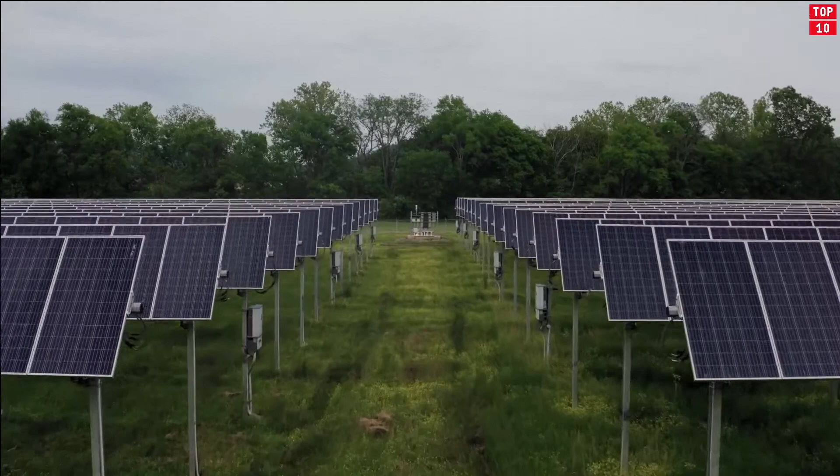It is estimated that we use a staggering 320 billion kilowatt-hours of energy every day. While most of this enormous requirement is addressed by burning fossil fuels like coal, petroleum oil, and natural gas, there are some exciting alternatives which are promising a cleaner and greener future. These are the 10 most promising future energy resources.

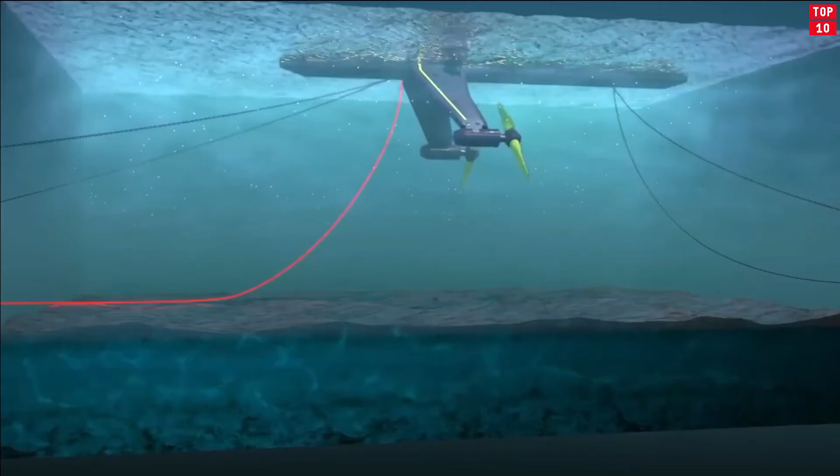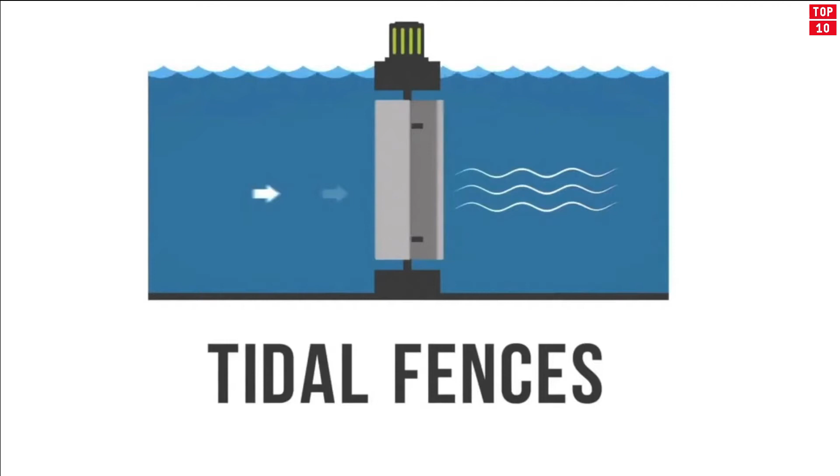Tidal power is one of the major renewable energy sources, but is in its early stages. It harnesses the energy from the tidal source and wave action from the gravitational pull of both the moon and the sun. Tidal power can be generated using 3 technologies. Barrages, or dams, are built across the bay or river estuary, which by controlling the flow rate through the turbines generates electricity. Tidal fences are a type of tidal power system that has vertical axis turbines mounted in a fence, or row, placed on the seabed.

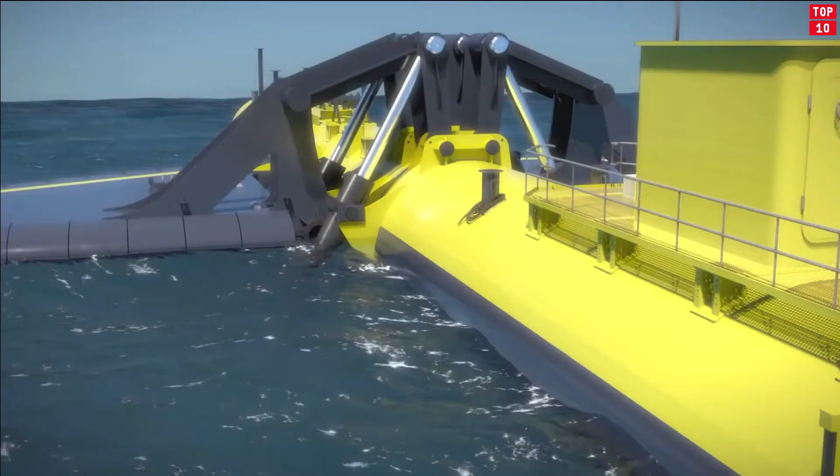Tidal turbines are arranged under water and rotate like wind turbines. Researchers feel that tidal technology development is more reliable, and the quality of the power produced by tidal sources is better than other renewable resources. So tidal power will play an important role in future technology.

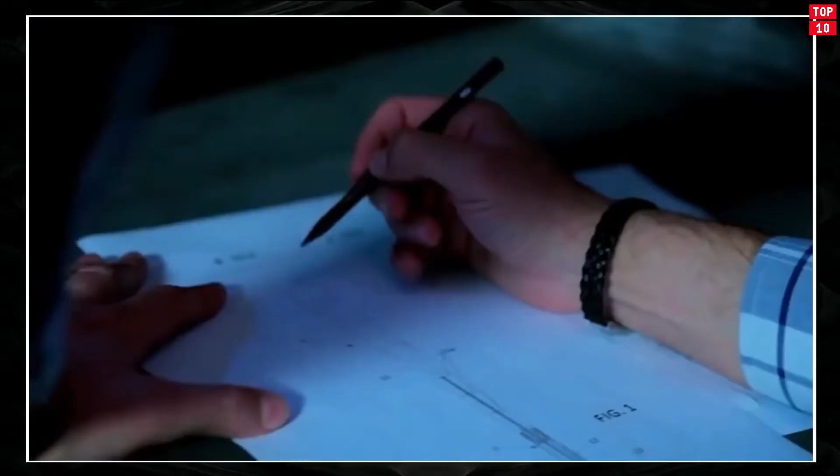Vortex bladeless. Any wind generator is potentially dangerous. The machine's kinetic power is almost impossible to control. That is why such power stations are typically mounted in remote places. This problem was addressed by the Spanish company Vortex Bladeless. Such wind generators turned out to be more efficient than traditional blade ones, and required less time and money to install. Furthermore, the system does not actually entail large rotating elements.

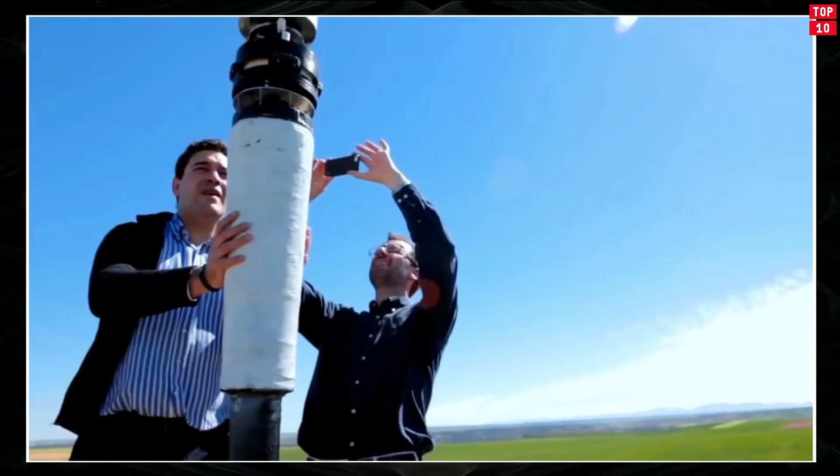The working principle of bladeless generators is way more difficult, but its efficiency could never be denied. Vortex flows blow at a vertical generator, thus moving the power generating axis. Obviously, designers do not disclose technical details. However, a single 492-foot high generator of this type can produce up to 1 megawatt of electricity.

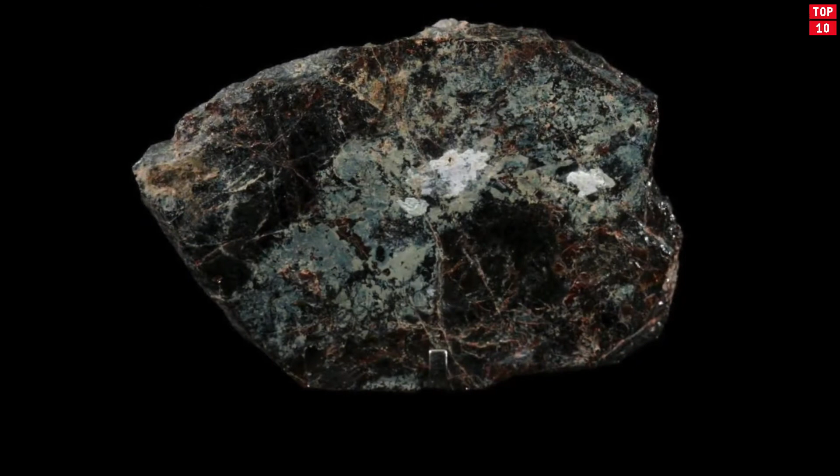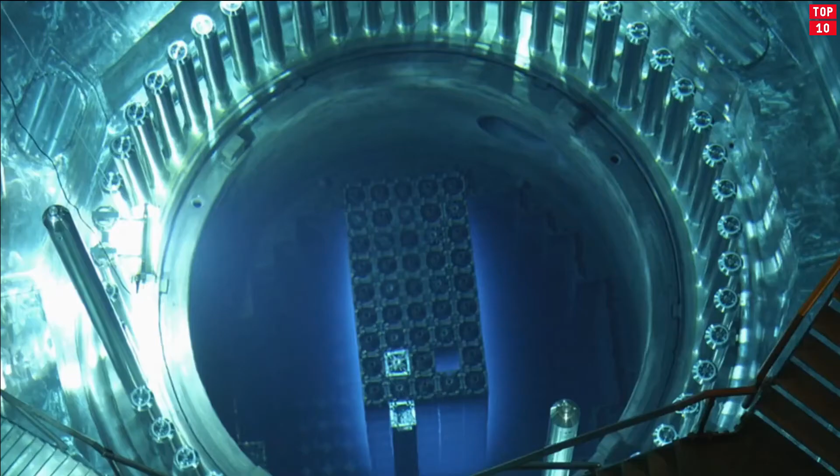Thorium. Thorium is the 90th element on the periodic table, the second heaviest element on Earth. Thorium is a basic element of nature, like iron and uranium. Like uranium, its properties allow it to be used to fuel a nuclear chain reaction that can run a power plant and make electricity. Thorium is around 3 times more abundant than uranium in the Earth's crust.

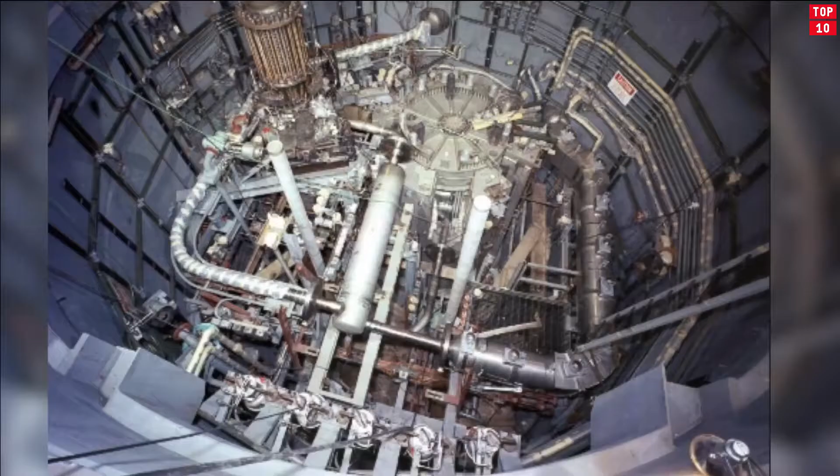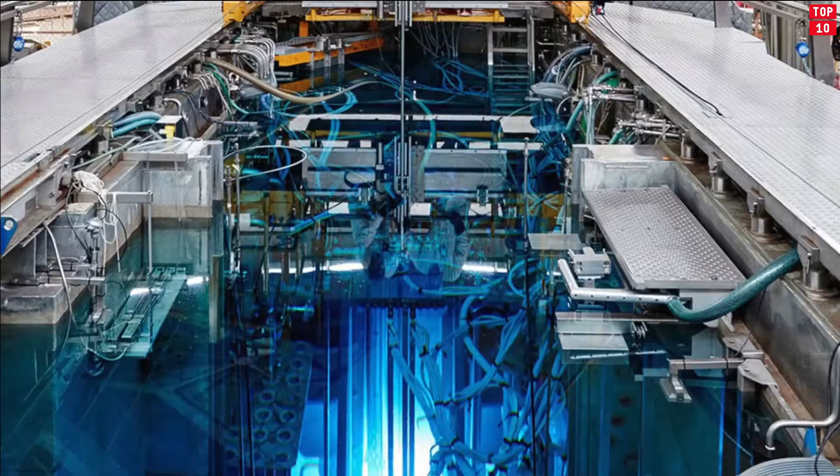Since the beginning of the nuclear era, significant scientific attention has been given to thorium's potential as a nuclear fuel. A thorium reactor burns nearly all of its fuel; as a result, it will produce less waste. Thorium reactors are a different way to generate electricity that could benefit the world—more efficient than their fossil fuel counterparts, safer than a conventional nuclear plant, and generating no carbon emissions as a byproduct. LFTRs are a viable solution for the future of our world's energy needs.

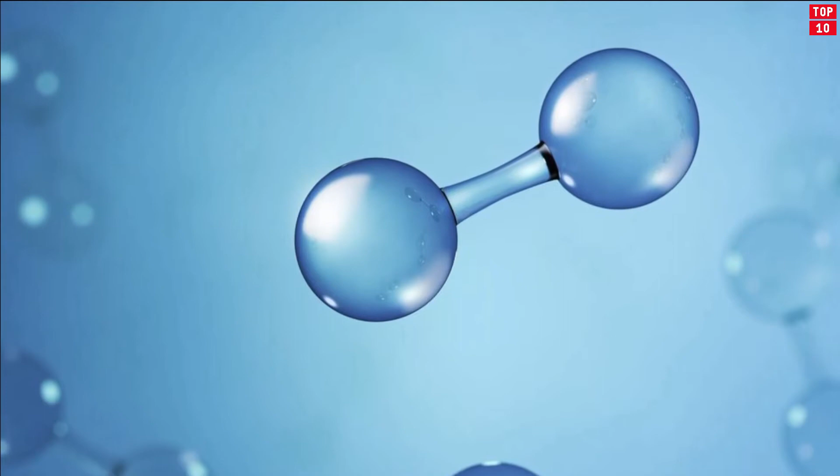Hydrogen. A colorless, odorless gas, hydrogen, which we all know from chemistry class, accounts for 74% of the total mass of the universe. It can be considered the simplest element in existence, which is abundantly available on Earth, but not in pure form. As hydrogen gas is lighter than air, it rises into the atmosphere. So hydrogen as a gas is not found naturally on Earth and must be manufactured.

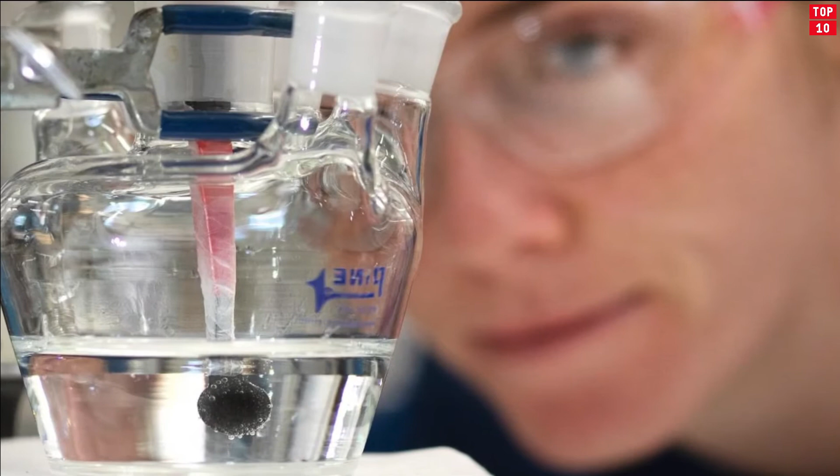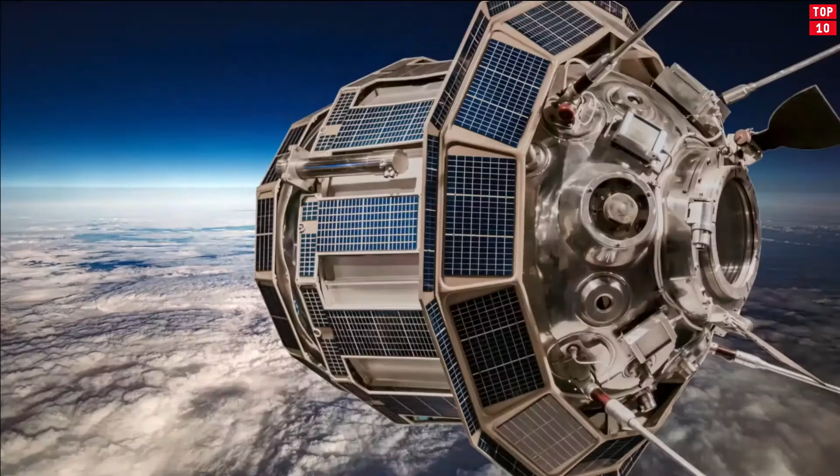Hydrogen has the highest energy content of any common fuel by weight, while also being the lowest energy content by volume. Currently, hydrogen is mainly used as a fuel in the NASA space program. Hydrogen will join electricity as an important energy carrier, since it can be made safely from renewable energy sources and is virtually non-polluting. It'll be fuel for zero-emissions vehicles.

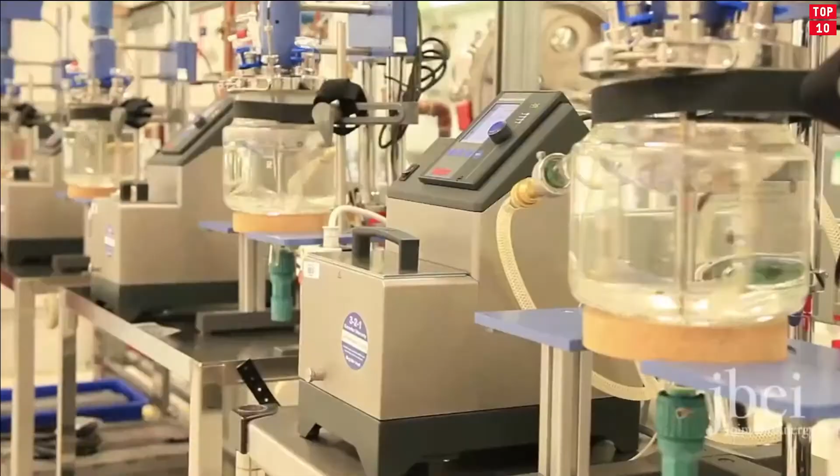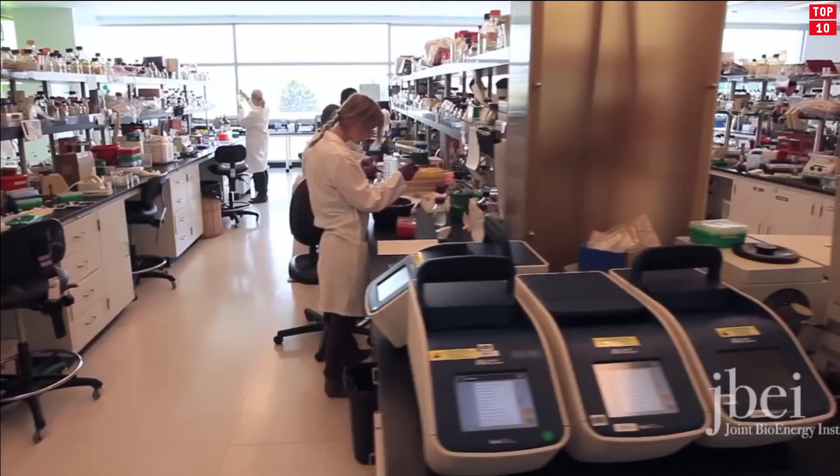Biofuels. Unlike other renewable energy sources, biomass can be converted directly into liquid fuels, called biofuels, to help meet transportation fuel needs. As biofuels emit less carbon dioxide than conventional fuels, they can be blended with existing fuels as an effective way of reducing CO2 emissions in the transport sector. New technologies and processes that produce fuels from waste and inedible crops are known as advanced or second-generation biofuels.

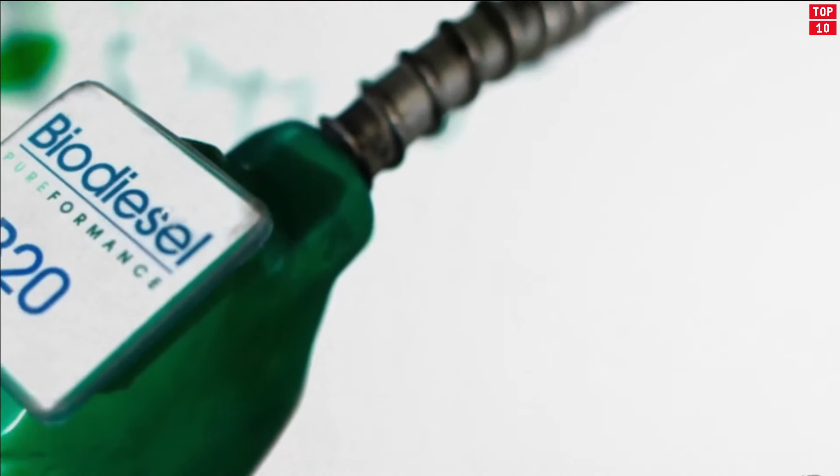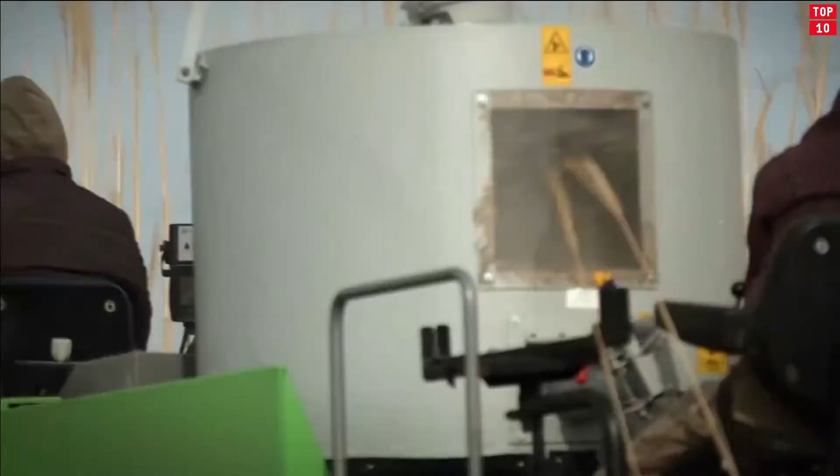The 2 most common types of biofuels in use today are ethanol and biodiesel, both of which represent the first generation of biofuel technology. Second-generation biofuels are derived from lignocellulosic crops and can be manufactured from different types of biomass. Interest in the use of biofuels worldwide has grown strongly in recent years due to high oil prices and concerns about climate change from greenhouse gas emissions.

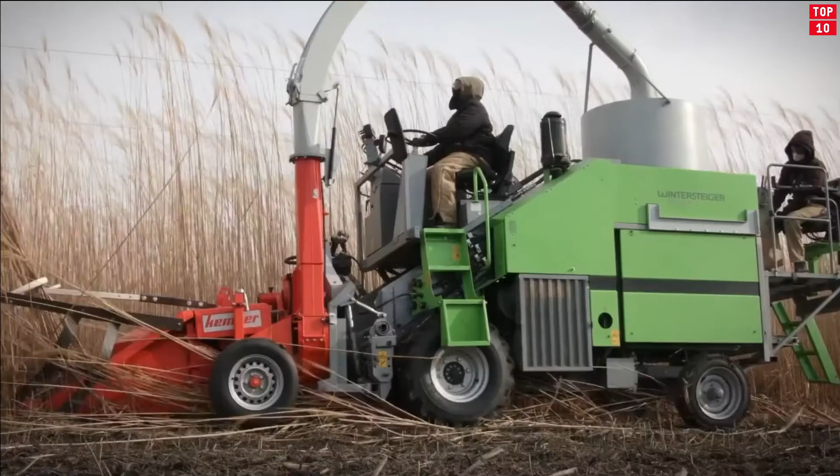In the future, they can be particularly important to help decarbonize aviation, marine, and heavy-duty road transport sectors. PaveGen.

People get more dependent on fossil fuels to produce electric power year by year. Resources don't add up, while the power consumption keeps increasing. The problem was of great interest to Laurence Kemball-Cook, as early as 2009, when he was a student at Loughborough University. In 10 years, he managed to create the PaveGen Company.

It manufactures sidewalk tiles that can convert pedestrians' energy into electrical power when they're walking over them. The tiles are made from recycled abrasion-resistant automobile tires. When stepped on, the tile surface depresses by 0.2 inches, inducing the induction transducer to generate electrical power. The energy can be used for sidewalk lights or accumulated in lithium batteries. The company's technology for this power generation is still kept secret.

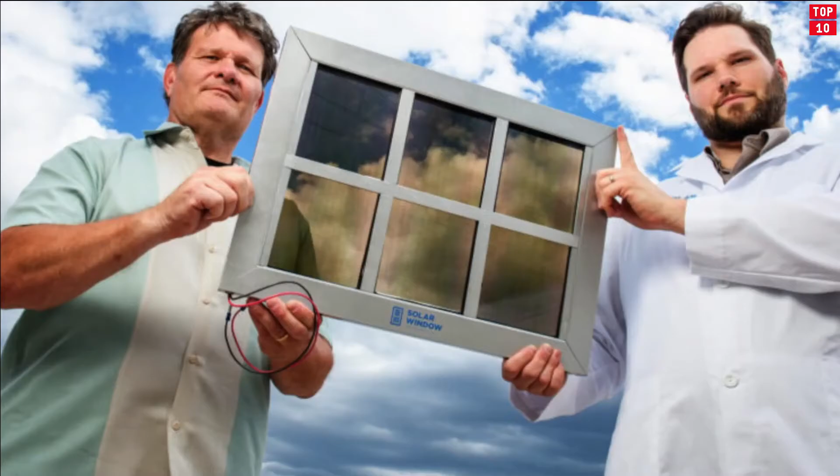Solar windows. Scientists have invented a new technology that will turn any window or glass into a photovoltaic solar cell. So your windows will turn into a solar panel. Solar windows passively produce solar power, and they could be a game-changing clean energy technology. Solar windows are exactly what they sound like: transparent windows that are capable of absorbing sunlight and turning it into useful electricity. These windows are capable of harvesting the part of the solar spectrum the eyes can't see and convert it into electricity, while letting regular visible light pass through.

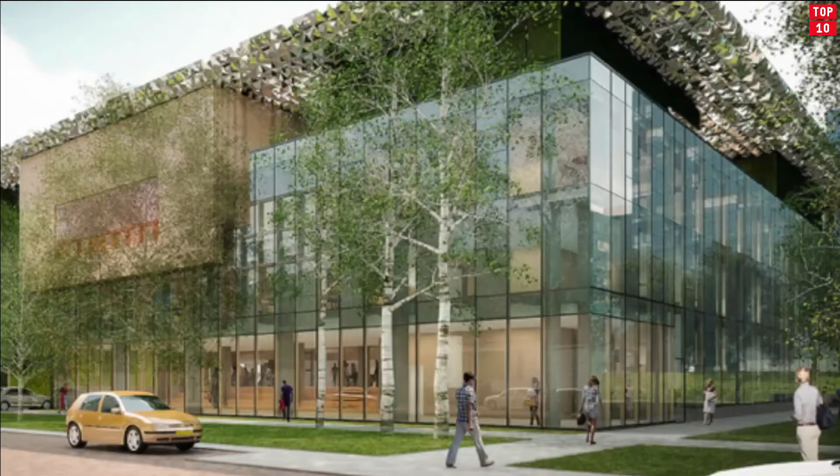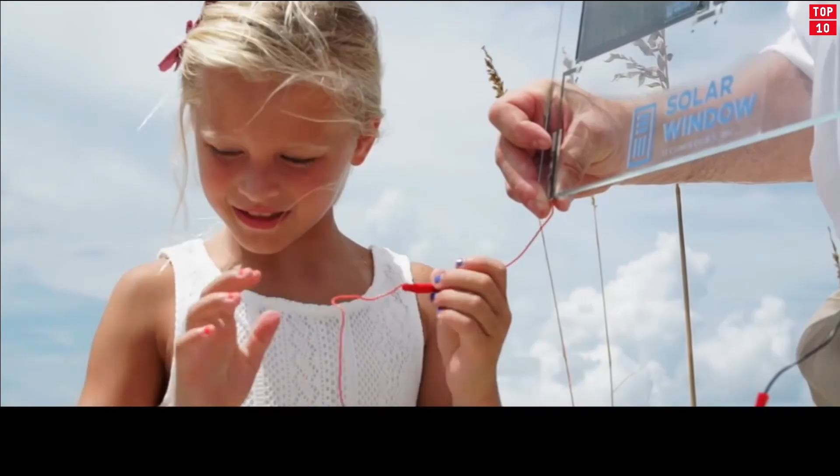Skyscrapers and other large buildings with glass facades use a coating on windows to reduce the glare and heat of the sun. So they can use sheets of transparent solar cells, which will help produce electricity to power the building too. Solar windows offer vast potential as an energy source. Renewable energy truly is having its moment in the sun, and this homely technology might play a significant role in our fight against climate change in the not-so-distant future. The current situation of this technology is not exactly awesome, but this is a step forward in figuring out how to turn windows into clean energy.

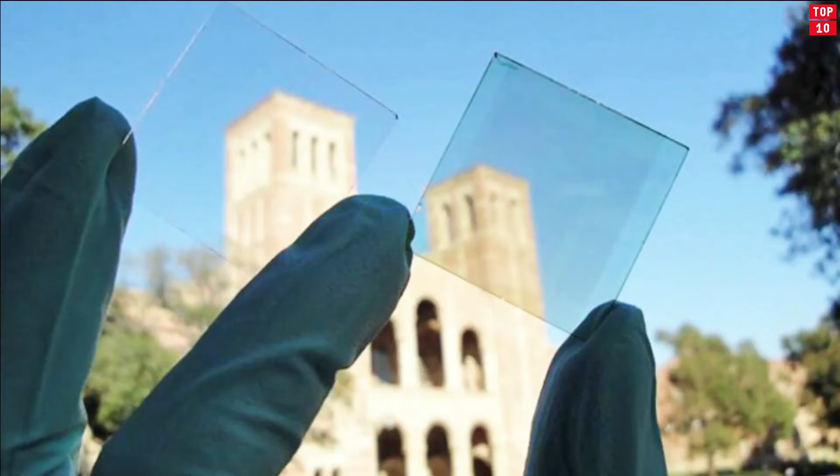Flying wind farms. As oil companies drill ever deeper to meet the world's thirst for fuel, a new wave of clean energy entrepreneurs are also searching far and wide for sources, but in the opposite direction. As you go higher, ground friction diminishes, giving way to increasingly stronger winds up to 100 miles per hour. Wind farms are constructed to harness this mechanical energy from the wind and convert it into electrical energy. Researchers estimate the high-altitude winds can provide 100 times more energy than currently needed to power the entire planet. At higher altitudes, the wind has more power and velocity, and it is more consistently predictable.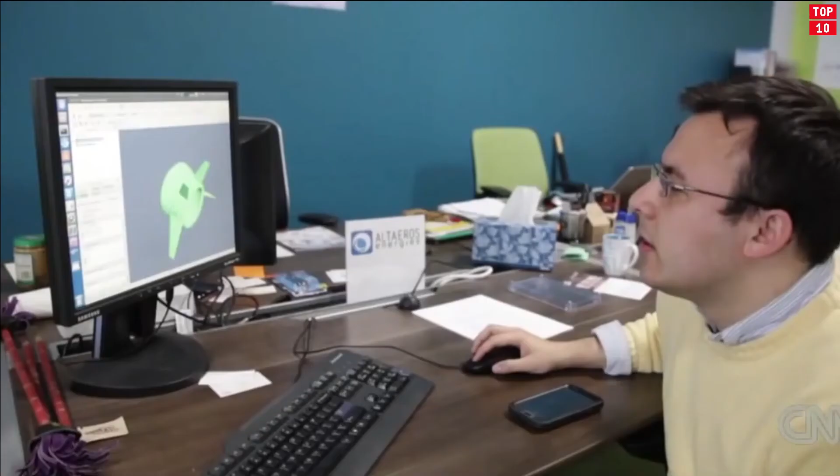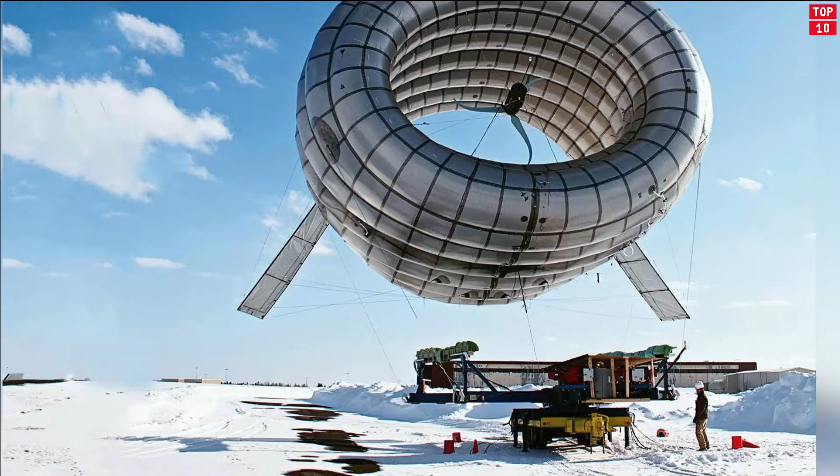That works out to be some 8 to 27 times the power produced at ground level. Right now, almost all wind projects are onshore, and the true energy bounty lives offshore, where winds are stronger and there are fewer restrictions on development. Wind turbines will increasingly move offshore in the near future. Countries like Denmark are already showing the rest of the world just how effective offshore wind energy can be.

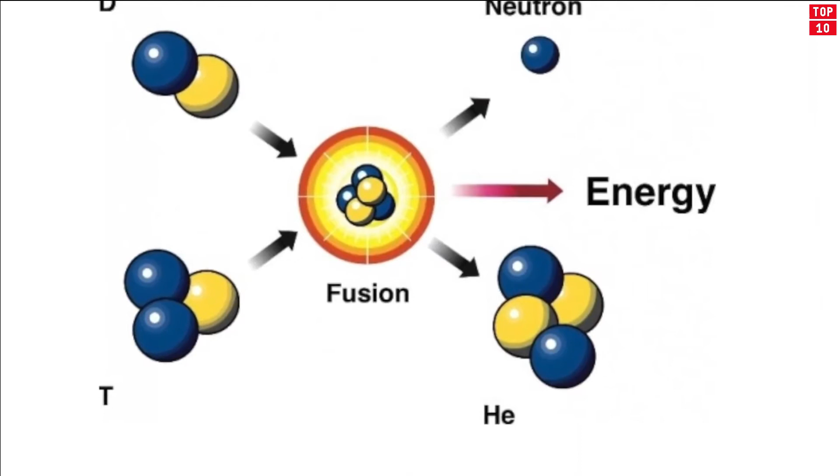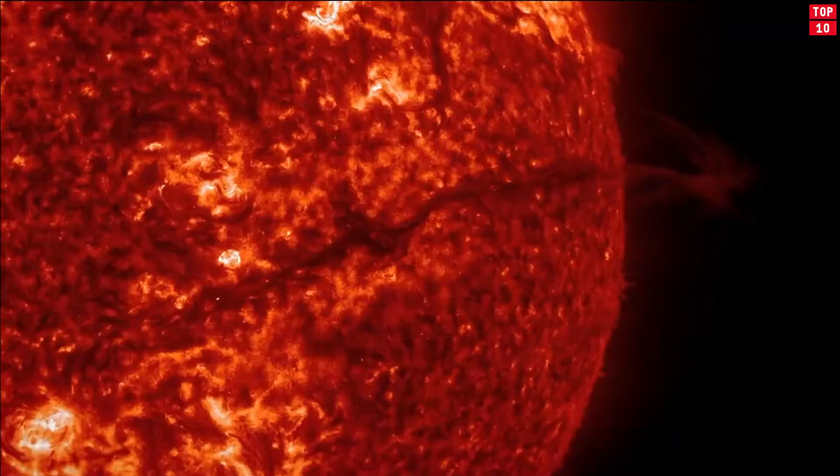Nuclear fusion. If there's a holy grail of clean energy generation, it's nuclear fusion, which promises limitless carbon-free power, without producing dangerous nuclear waste. Nuclear energy is gaining increasing importance as a clean source of power, meeting 13 to 14% of the planet's power needs. Fusion is the process that drives our sun. Natural solar fusion generates enormous quantities of heat and light. For decades, researchers have been trying to replicate this process on Earth, or build the sun in a box, as one physicist dubbed it. The basic idea is to take a type of hydrogen gas, heat it to more than 100 million degrees until it forms a thin, fragile cloud called plasma.

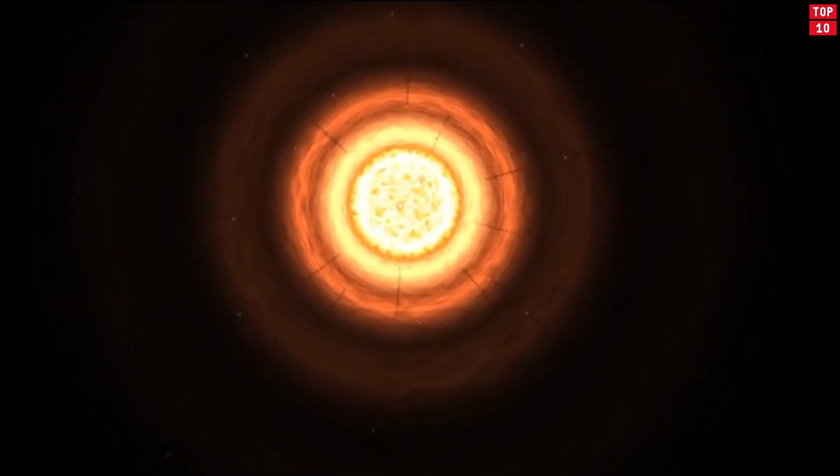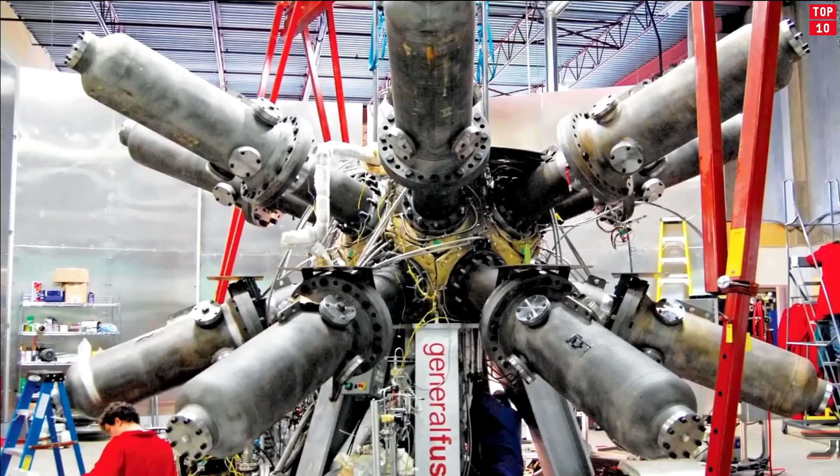And then control it with powerful magnets until the atoms fuse and release energy. In simple words, a man-built sun. Fusion has the potential to be a high-efficiency resource that is also extremely clean. Expect more nuclear power plants going forward, but not many. If the technology develops to a dependable level, it could well be the new king of the energy world, and could potentially be implemented anywhere.

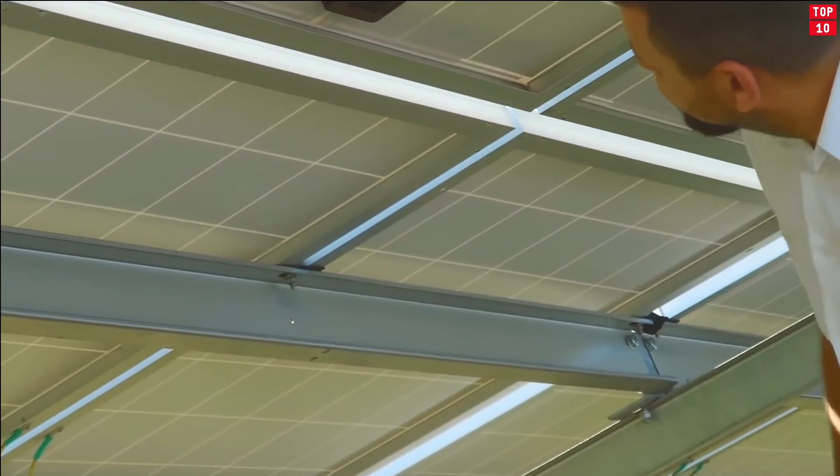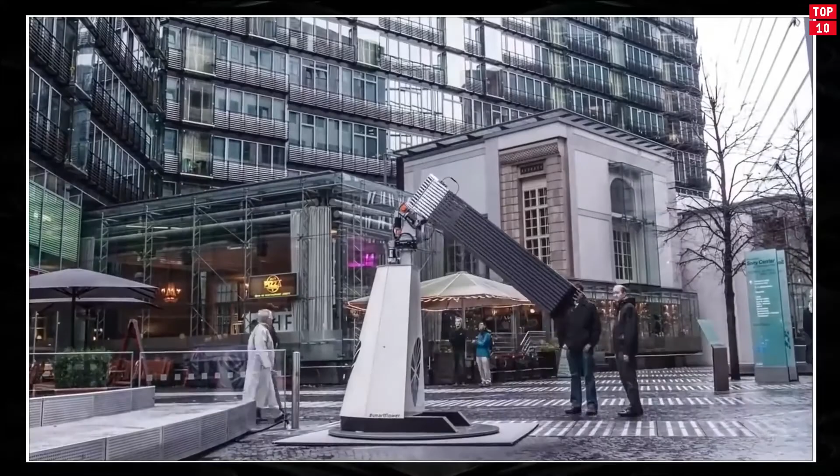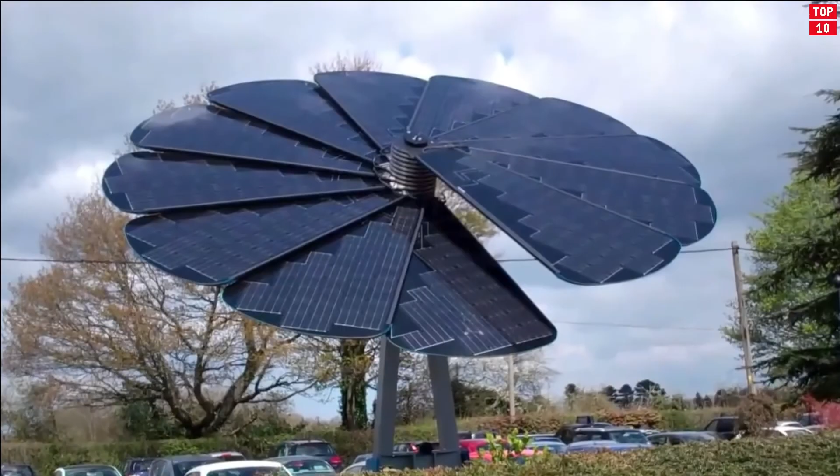Smart Flower Solar. Manufacturers of solar systems generating electric power state that the minimum area to supply electricity for the needs of one household should be at least 22 square yards. This is a significant fact to consider. Using the system Smart Flower Solar, we can forget about the total area of power generating surface. Here are the major reasons for that. First, the system tracks the sun's position. Second, it employs unique panels. These factors make Smart Flower Solar 40% more efficient than its competitors.